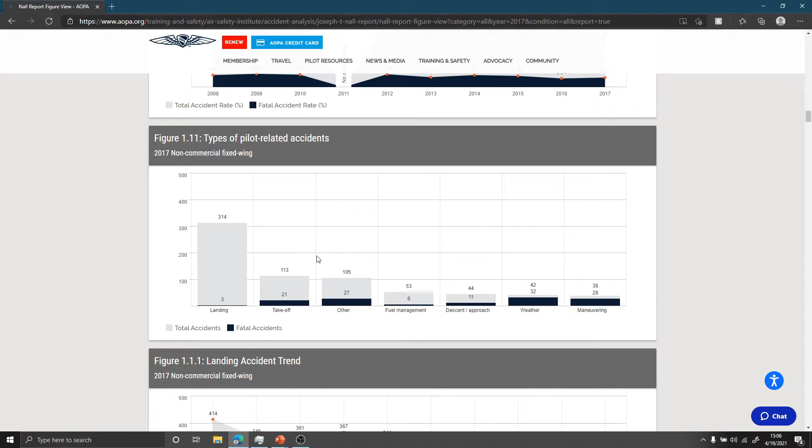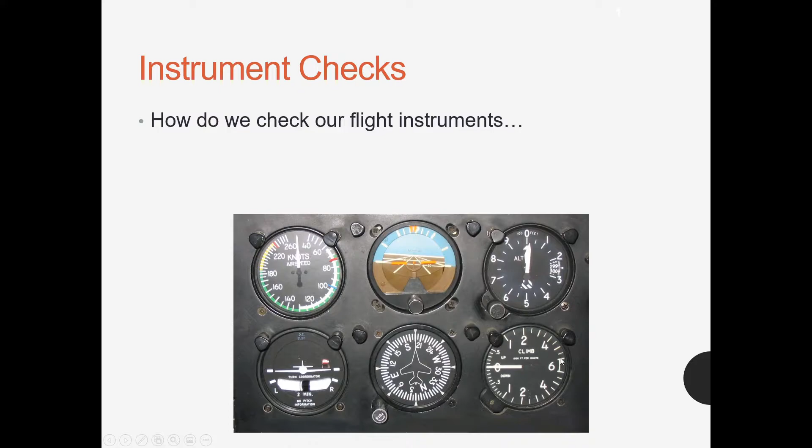Before start, and this is very simple, really easy to see, you have your turn coordinator, which is on the left, and you have your attitude indicator, which is on the right. Before you even start the plane, before that engine-driven vacuum pump comes on, you want to have these red flags here, and you want to have your ball in the center.

Your ball is your inclinometer, which reacts to the g-forces of the plane. But all it is, is like no sort of mechanism except a ball suspended in a tube of fluid. That's all it is. Just think of a level, how you move a level left and right - that bubble is going to go left and right. So that's all you really have to do before start for your turn coordinator and attitude indicator.

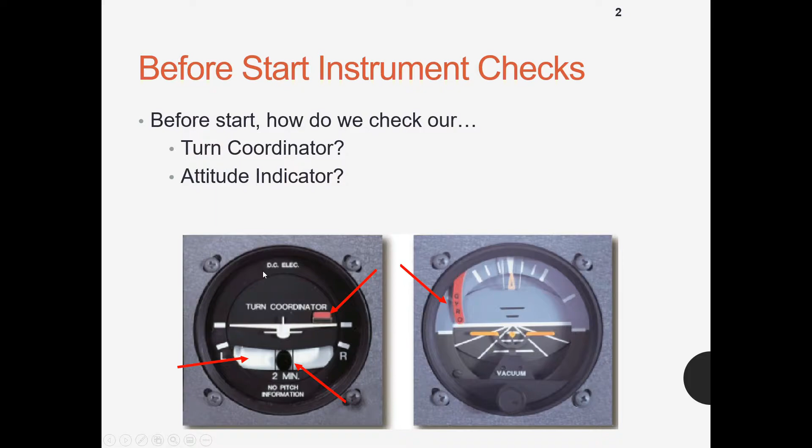Now, after you start your aircraft, there's just a few things you want to make sure are going on. Most aircraft have a low voltage or low vacuum indicator, but you can actually visually check that. Your ammeter, which is like the electrical load of the aircraft, is very important when it comes to your DG and other electrically driven instruments.

And then your suction gauge is most important, because some turn coordinators are actually suction gauge or a combination of both suction and electrical. But really crucial instruments are your attitude indicator and your directional gyro, because if you don't have that suction gauge, it's not going to be good whenever you go for an IFR flight and then all of a sudden none of your instruments are working that rely on the vacuum gauge.

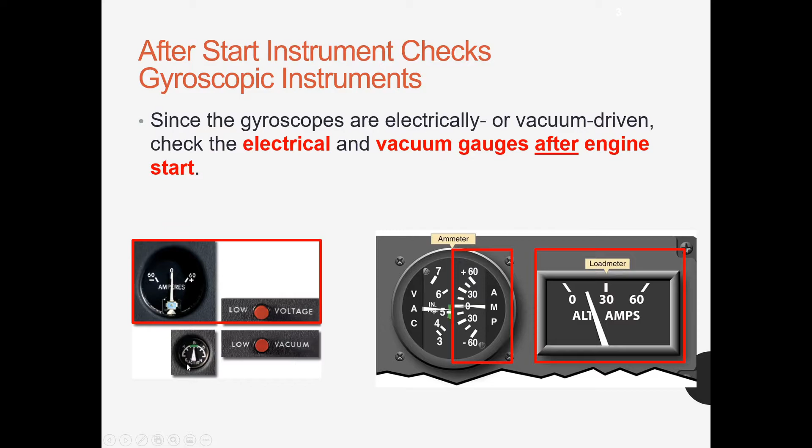The next, and once again really easy to check, is your magnetic compass. It should swing freely as you turn. Let's say we're on this taxiway at Bravo going more or less south - you want to make sure the compass is indicating the known heading. And let's say you're turning onto Charlie down here, you want to see that magnetic compass turn 90 degrees to the right. So main thing is swing freely and indicate known headings.

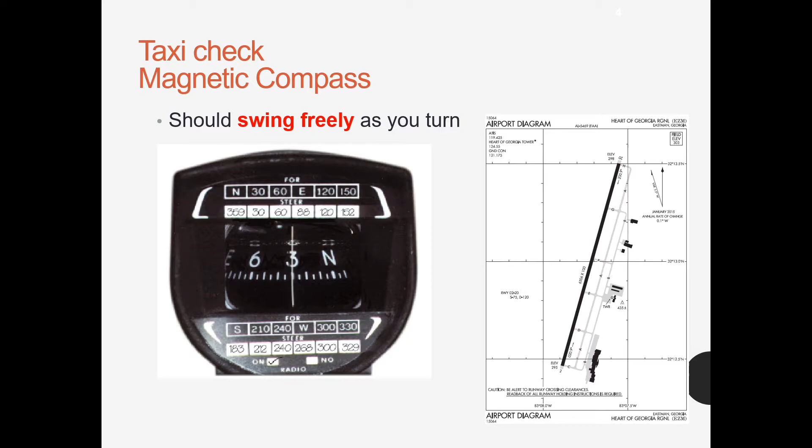So there's 3 main turn instruments that you need to know about: your rate of turn indicator or turn coordinator on most planes, your directional gyro or heading indicator, and your magnetic compass. When it comes to your heading indicator, after the engine-driven vacuum pump is already producing its suction and everything's good there, you want to set it to the known heading of your magnetic compass. And then, like I just said, you want the directional gyro to indicate known headings along with the compass.

So let's say if this directional gyro was set to north and we turn east, you want both of them to turn to east, swing freely, and indicate known headings. And then, of course, you have your rate of turn indicator. You want your rate of turn indicator to indicate a right turn, or if you had a turn coordinator, you have wings level here, you want it to indicate a turn to the right.

And then your ball wants to move outside of the turn, because think of it, a plane is stuck on the ground. It doesn't have that 3-degree freedom of motion. Think of it like a car. Whenever you're turning in a car, your body tends to go to the left outside of the turn. That's exactly what's happening here, because the plane can't yaw to the left due to it being stuck on the ground.

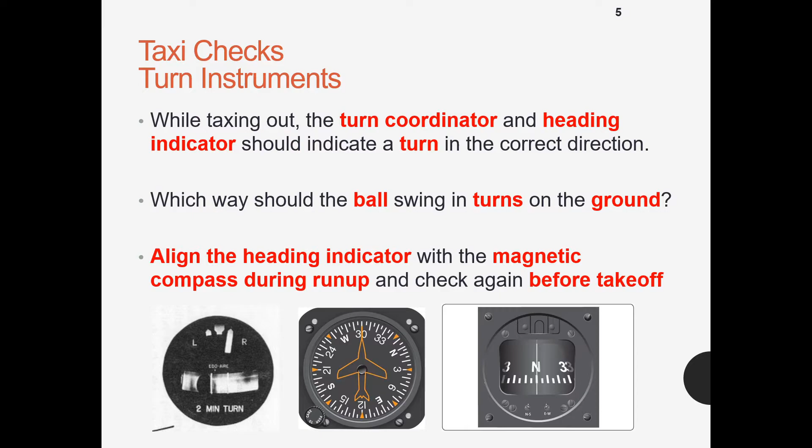I might have just stated this, but with your attitude indicator, your gyros actually have to have time to spin up. And this is the same for your directional gyro. As that vacuum pump starts to get powered by the engine, it usually takes about 5 minutes to get reliable readings on your attitude indicator and other gyroscopic instruments.

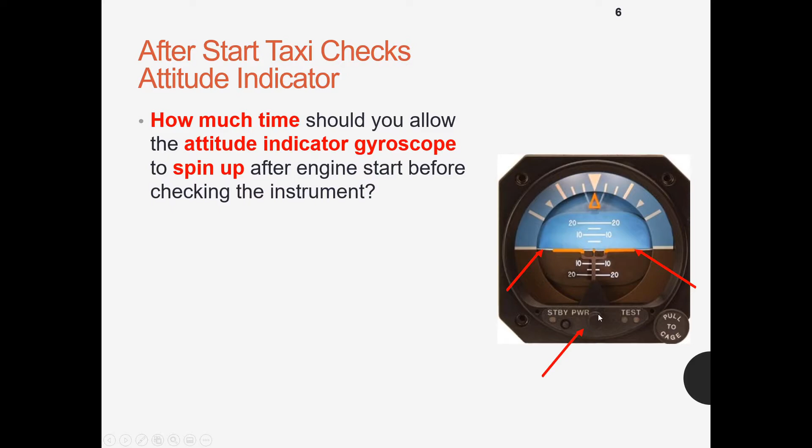Right here, we see the artificial horizon. You want to make sure that artificial horizon right here, not the orange wingtips, but the artificial horizon, is erect and stable after 5 minutes of starting the aircraft. And then of course you set these little wingtips with this little knob right here to that artificial horizon.

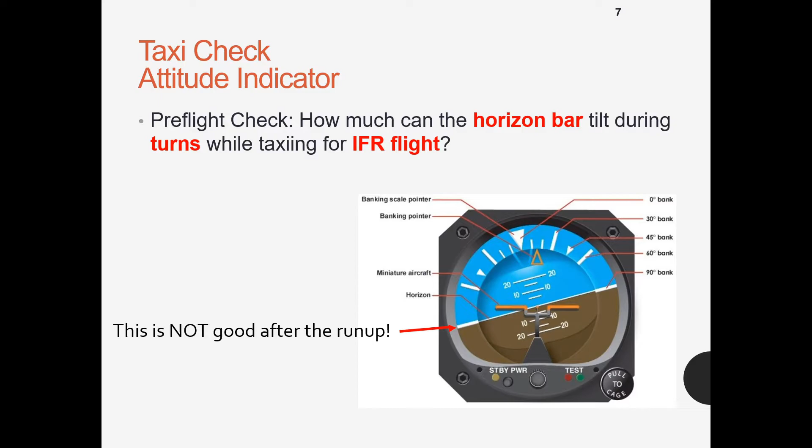One main thing you got to know, and of course this is on your written test, whenever you're making turns while taxiing on your attitude indicator, you don't want that artificial horizon to bank more than 5 degrees, or that's going to cause your plane to not be IFR worthy, because your attitude indicator is technically busted and it's not working properly. Because 5 degrees of bank in IFR flight is actually a lot, believe it or not, with how precise you have to be.

Once again, we have your directional gyro right here. And much like the attitude indicator, you have to wait 5 minutes after you start the aircraft for your engine-driven vacuum pump to come alive and stabilize your instruments. Once again, whenever you're on the ground taxiing or whatever, you set this directional gyro with this little knob right here to your known magnetic compass heading, and you're good to go.

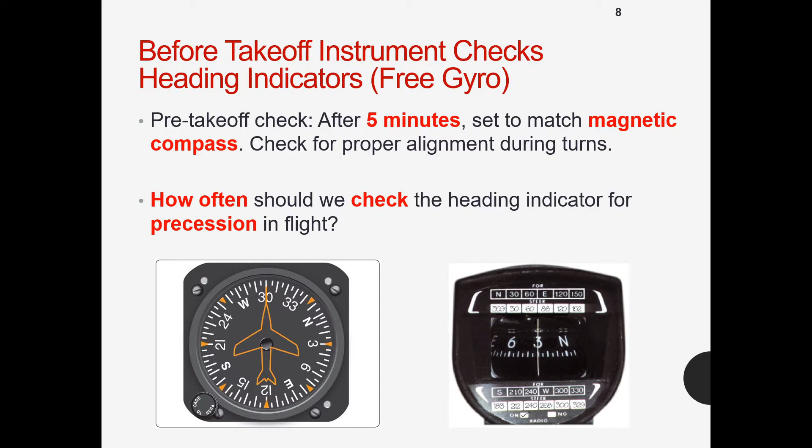However, in flight, as we know, the compass has a lot of errors, especially in turns and banking. In a banking turn, let's say, that compass is not going to indicate the accurate heading. So it is best practice every 15 minutes to set your directional gyro to the compass heading when the aircraft is in straight and level, unaccelerated flight, so you get the most accurate magnetic compass heading.

Next, we have our altimeter. What should you set it to? You should set it to whatever the barometric pressure is on your METAR, your TAF, or your ATIS. And whenever you set that, it has to be within 75 feet of the known airport elevation.

However, if you're just out in the middle of nowhere at this private airport, it is legally allowed for you to set it within the elevation of that airport. Let's say on your sectional chart, it says 300 feet. So you just set it to 300 feet. And of course, when you climb out, you make sure that long hand is indicating a positive rate of climb.

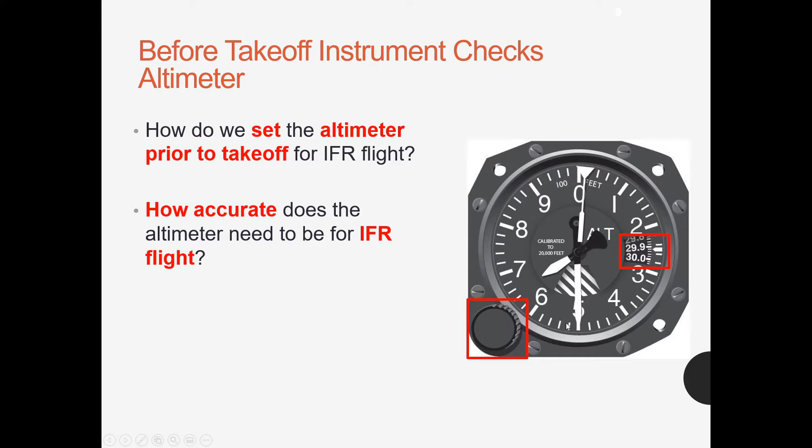The next one we have is the vertical speed indicator, which is not required for IFR flight, of course, but it's still really nice to have, especially when you're doing standard rate climbs and descents. The main thing you got to think about this though is notice wherever it is reading.

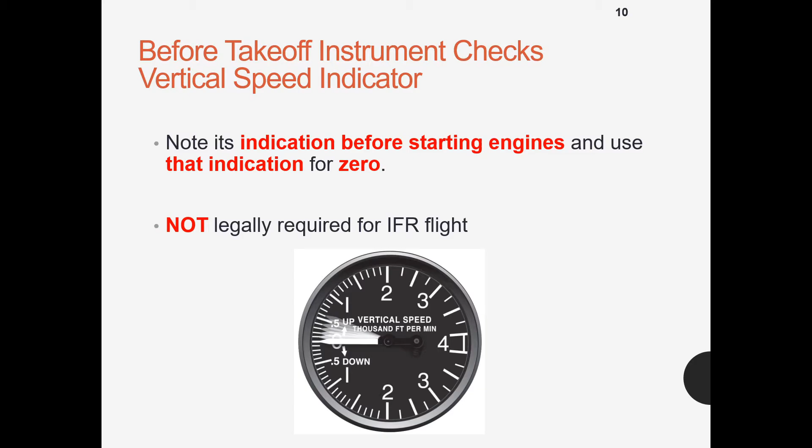So for example, this is reading 0, so it's fine. But if it was reading negative 500 feet a minute, you would make that as your 0. So let's say you're descending and it's reading negative 1,000. That's actually going to be negative 500 from negative 500. And if it's reading 0, that's going to be reading a positive rate of climb of 500 feet a minute, which is completely fine. But remember, it is not legally required for IFR flight.

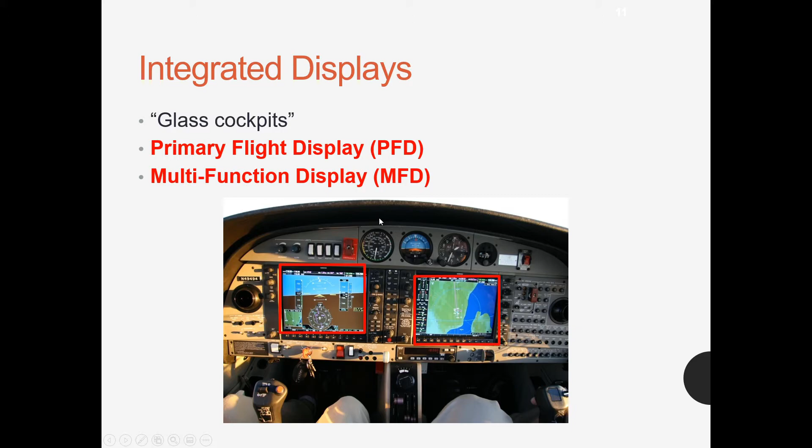Next we have a brief overview of how these instruments work and what to look for. You have the primary flight display and the multifunction display. The multifunction display is usually on the right, and the primary flight display is on the left.

Now, how these work - it's not an engine-driven vacuum pump or pitot-static system anymore. It's actually electrical instruments such as your attitude and heading reference system, which roughly corresponds to your vacuum-driven instruments, and your air data computer, which roughly corresponds to your pitot-static instruments and gives you pretty much the same exact data, but usually a lot more accurately.

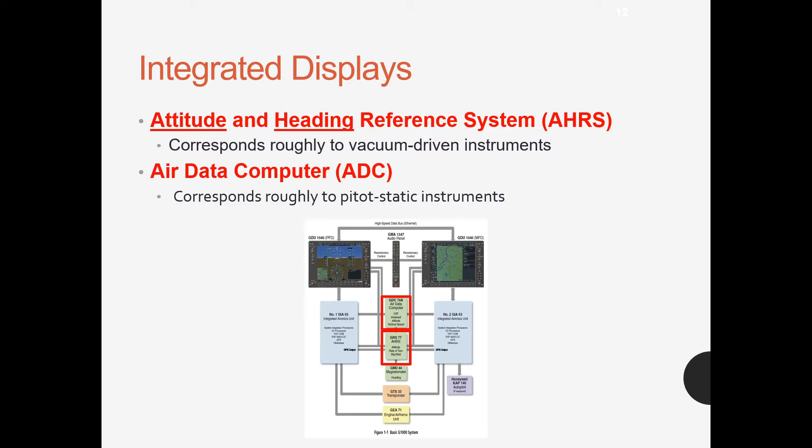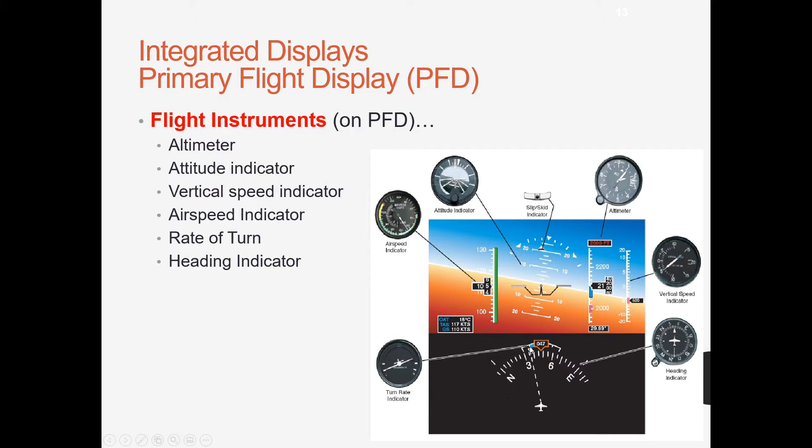So in IFR flight, 9 times out of 10, you're going to want to keep that little trend indicator right here on this line. And of course you've got your heading indicator - for example, right now we are on a northeasterly heading. So that is all the instruments you need to know there.

Of course, you have your ILS localizer and glide slope and GPS course guidance. It's going to look different on a G1000, and I really encourage you to find a G1000 sim that you can use - I'm pretty sure they have electronic ones you can download for your computer or iPad or whatever.

Anything you're confused about, you can look up really good in-depth YouTube videos. Like I watched this 2-hour G1000 video because I was transitioning from steam to glass cockpit, and I was actually really nervous because I was so used to steam - I'd done like 80 hours before then. But of course, glass cockpits are superior, it's just they lead to complacency and whatnot.

You also have your trend arrows, located right next to each instrument. So for the altimeter, you would be on a negative rate of descent. Your VSI, also with this little trend indicator, you would once again be on a negative rate of descent. Airspeed indicator - you would be losing airspeed in this case. And you have one more trend arrow - it's not really an arrow, it's that strip I talked about that gives you your standard rate turn right here. It's blue or magenta, whichever one.

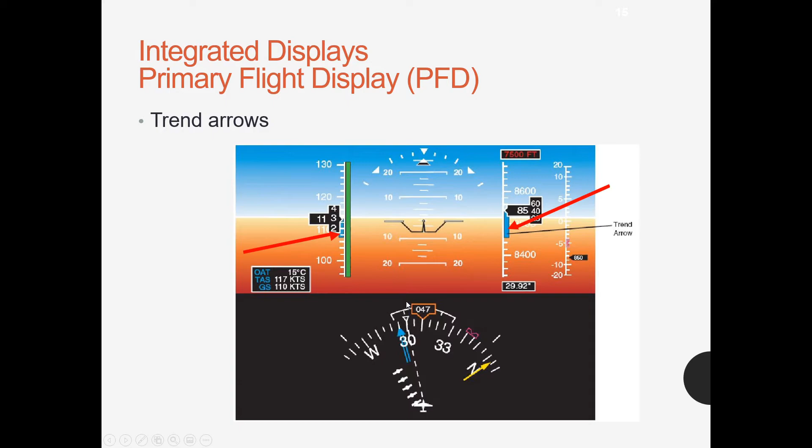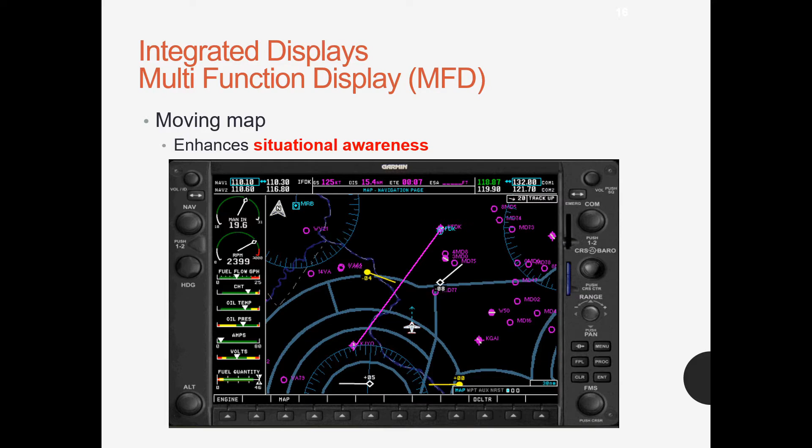You also have a moving map on your MFD. So we're moving over to the MFD, which is to the right. The moving map greatly increases situational awareness, because when you're trying to visualize in space where you are with just a 6-pack and nothing else, it can get kind of overwhelming sometimes. But this, I will admit, makes everything so much easier.

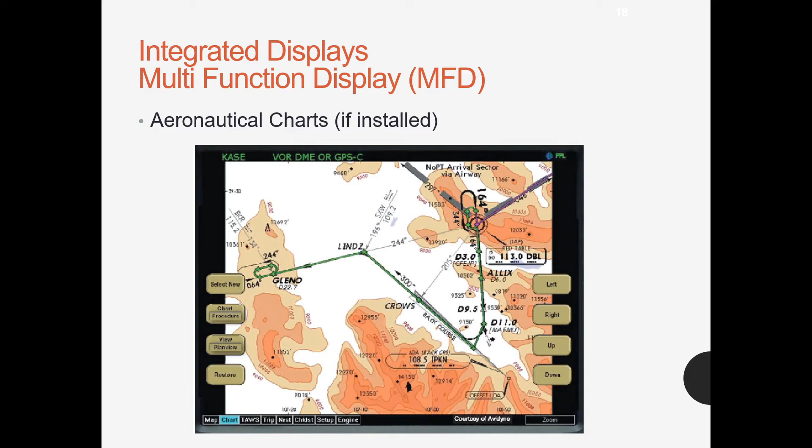You also have weather if installed. Some aircraft don't, but mostly if you have ADS-B in, you get that FIS-B flight information service broadcast that goes to your aircraft and gives you weather information and whatnot.

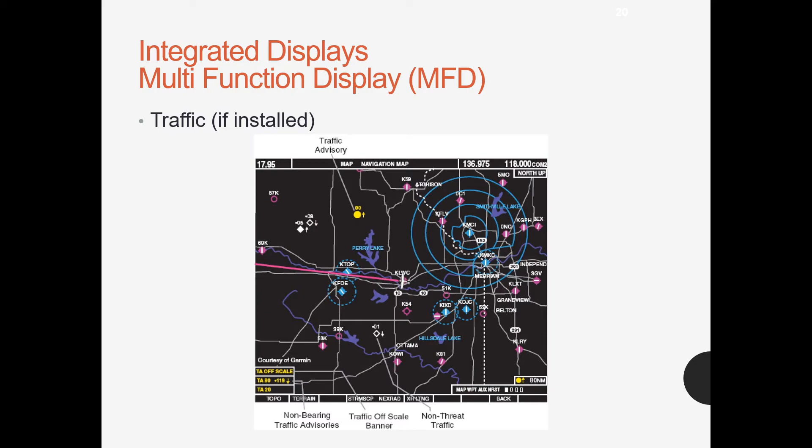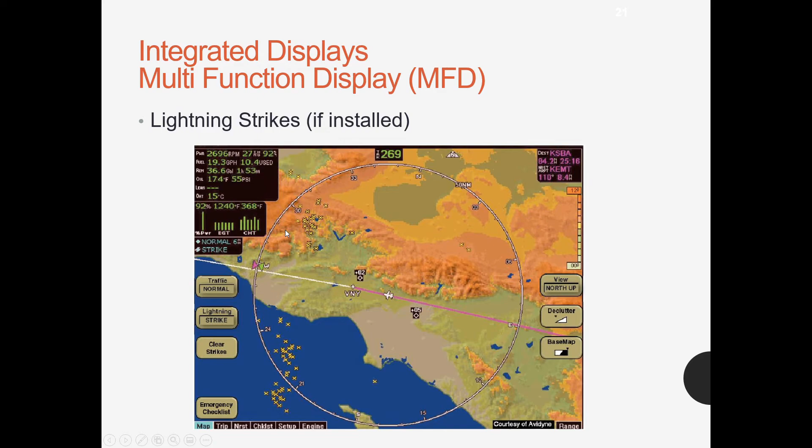Traffic, if installed, ADS-B In will give you that information from other ADS-B Out aircraft in the area. Lightning strikes are really cool to look at and give you a good visualization of where thunderstorm cells are located, like a multi-cell here and a cell right there, so you can watch and know where the intensity of the thunderstorm is.

Next, we have a flight plan, located on your PFD, which is incredibly important to know how to properly, effectively, and accurately change during your flight, because amended routes are common in aviation. You're flying from point A to point B, but all of a sudden the controller wants you to fly from point A to point C to point B. You've got to know how to change that, and if you're not proficient, there's a good chance you might enter the wrong fix, which could destroy your situational awareness.

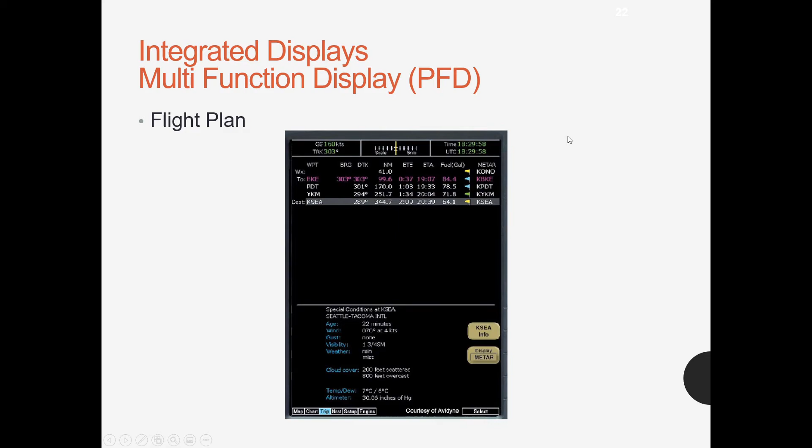You get lost and crash — that would not be good. And the G1000, of course, looks different, but it still gives you the same information, such as RPM, manifold pressure, power, oil temperature, and oil pressure. So your MFD is going to give you your engine and systems.

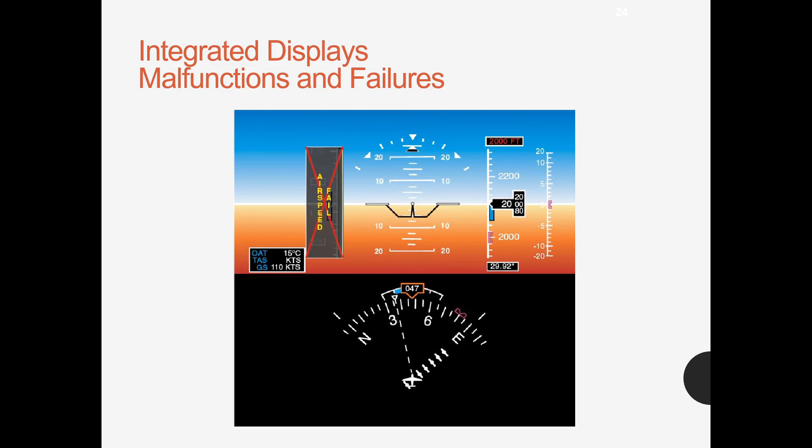What I love, and haven't actually seen in practice, is that with the old six-packs it would be really hard to know which instruments were failing, because those conflicts aren't as pronounced as you'd think in actual flight. However, with your PFD, it just draws a big red X over the instrument that's not working, which lets the pilot diagnose the problem a lot sooner, know what they have, and jump to resolutions quicker, instead of thinking your airspeed's working when it's really not.

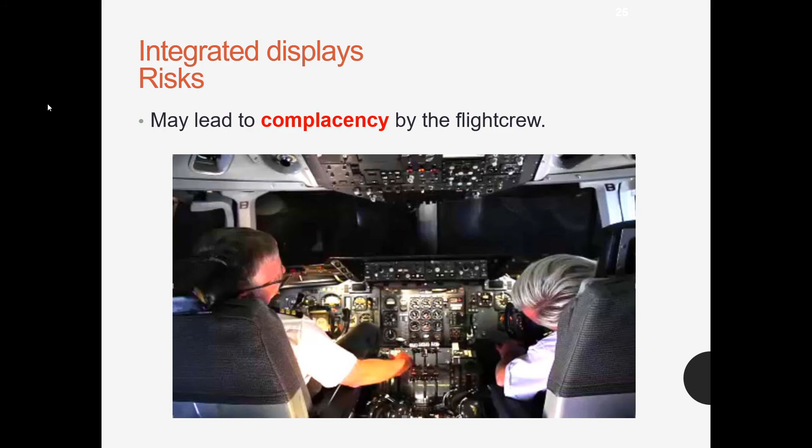However, with all this informational technology — cool stuff, easy to use — it leads to complacency, which is a big thing to watch out for. Let's say you're flying from point A to point B, got all your charts pulled up on screen, you're on autopilot — that can really cause your mind to wander. You're just chilling there, and then ATC is talking to you, and all of a sudden you're complacent and behind the aircraft. So watch out for that, which is why learning on a six-pack is so useful, because you're always on top of things, making sure you're as safe as possible.

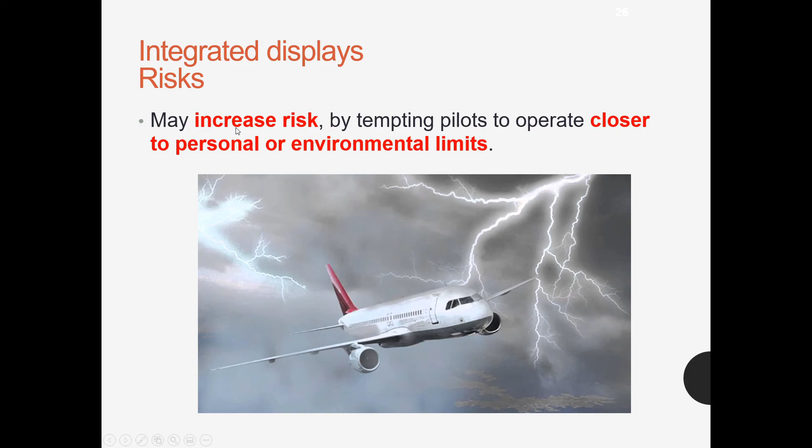You'll see this exact phrase on your written test: this tempts pilots to operate closer to personal or environmental limits. Going back to weather, you can see weather off to the left, to the north, whatever. A few pilots will actually operate a lot closer to thunderstorms than they would if they didn't have the equipment.

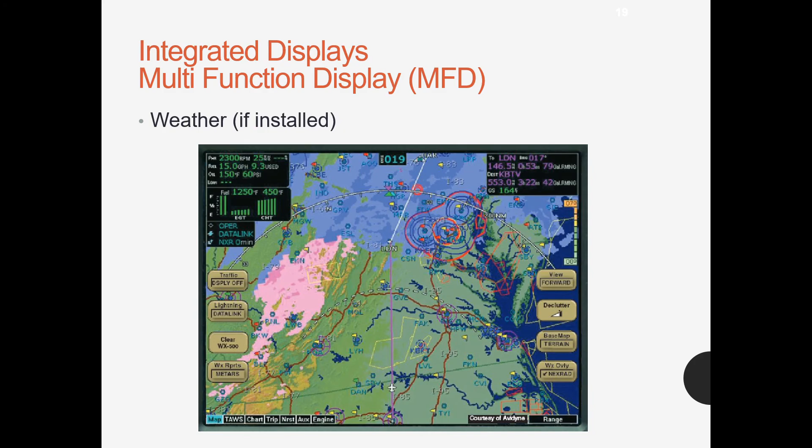But the thing with radar is it only predicts precipitation — it never predicts cloud cover. So you could have a microburst ready to burst at any second, destroy your aircraft, and not even know about it because you're relying on the radar.

So the very last thing: integrated flight displays may present new hazards and limitations. The main thing to be aware of is complacency. You don't want to become complacent knowing or using these instruments — you really want to stay ahead of the aircraft in every way and know how to use all the equipment on board.

So I really urge y'all to go get a G1000 sim or even Microsoft Flight Simulator. The new one you can get for a dollar — of course you have to apply for the subscription, but you can cancel that. That's what I actually did: I bought it for a dollar, downloaded it. It was a massive game, of course, and I used the G1000.

And I actually went to my very first lesson, and the instructor was like, 'Wow, you're pretty good at using this.' So keep that in mind — get proficient with everything that comes your way, and that goes with anything else, you know.